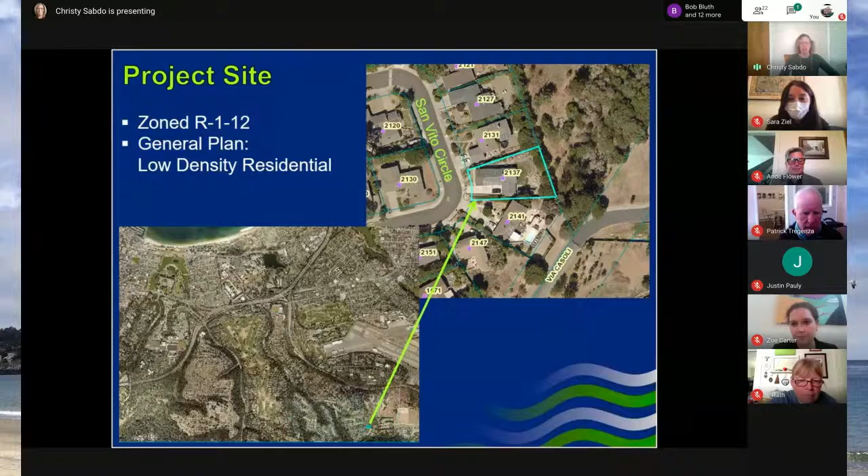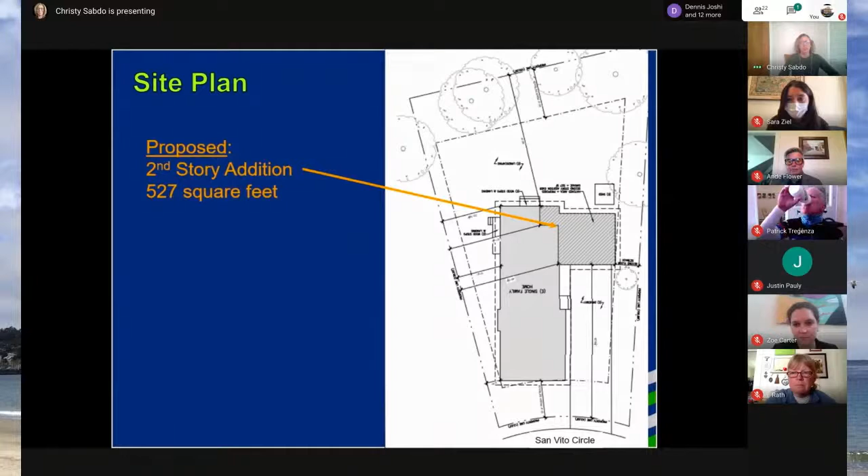The property is located in the Fisherman Flats neighborhood. It's zoned R1-12 and has a general plan land use designation of low density residential. The proposed site plan shows the second story addition located approximately 62 feet from San Vito Circle. The proposed addition is 527 square feet.

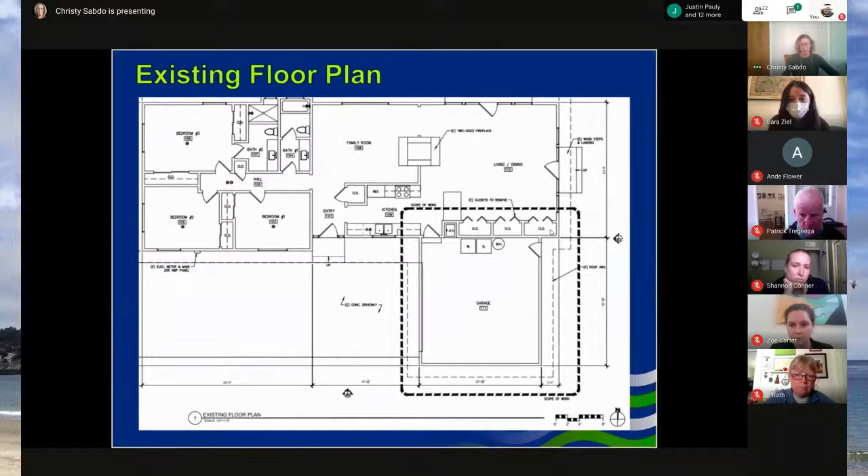This is the existing floor plan, showing the existing garage and some closet spaces by the garage that are going to be demolished for a stairwell leading to the second story. Here's the proposed first floor and second floor plan. On the first floor plan, it shows the location of the stairwell, previously closet space in the house. On the second floor, you'll see there's living space above the garage and a second story stairwell.

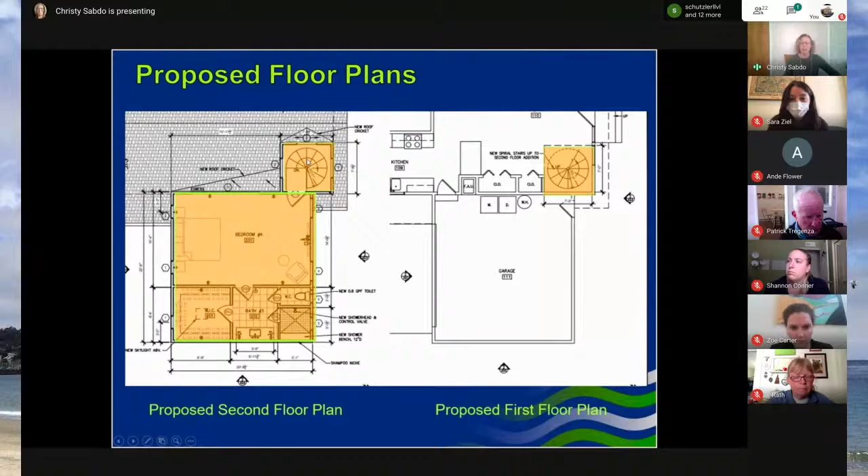This is showing the proposed location of the second story addition. It's located approximately 7 to 12 feet from 2141, the closest residence to this addition. The addition is located approximately 45 feet from 2131, so further than this one here. The back of the lot backs up onto this vegetation corridor.

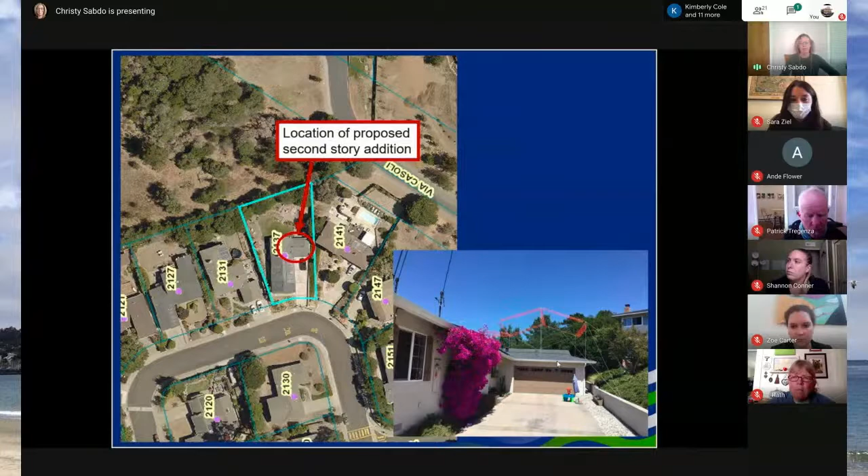Here's a picture of the story poles, I have some better pictures coming up. This is the west elevation on the San Vito frontage, showing the second story addition here over the garage, and then the second story stairwell here.

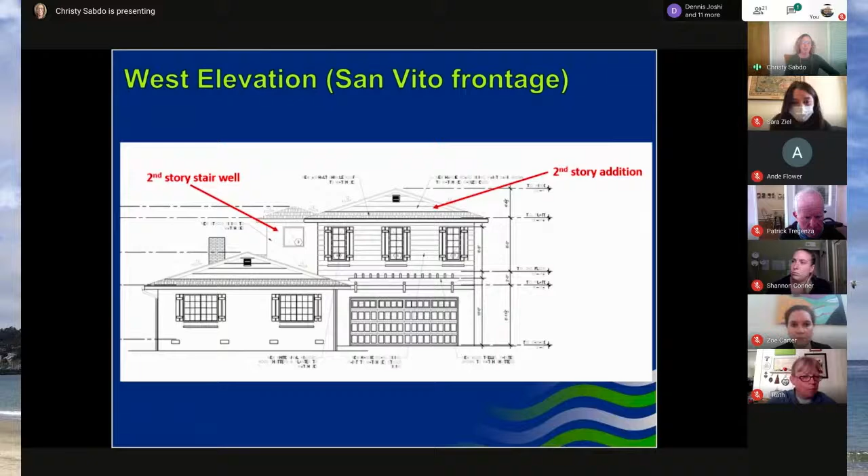The second story addition will have hardy board siding, which complements the gable element on the existing residence. Also, the windows will match, not in size, but in style, and they'll have shutters, and landscape planters under each window, which matches the existing residence. The second story stairwell will have stucco siding.

Here's the north elevation, which is the elevation furthest from the adjacent neighbor, about 45 feet. They do have windows, but due to the distance between the residences, there should not be privacy impacts. There still will be hardy board siding on the addition, and the stairwell will have stucco.

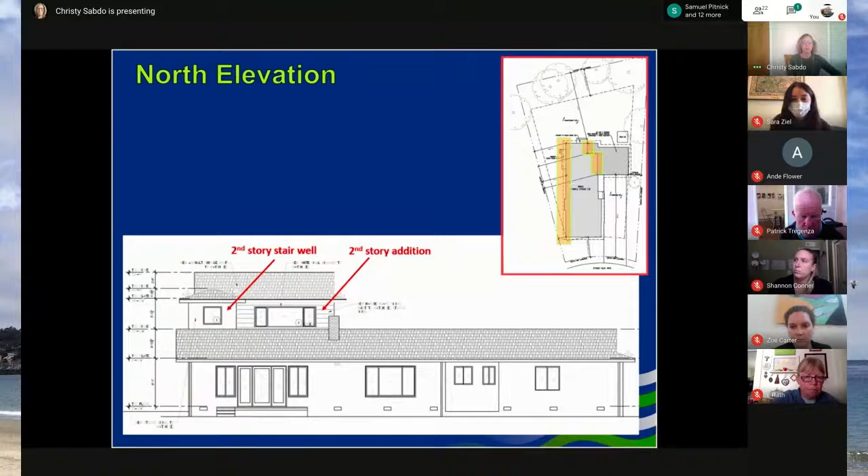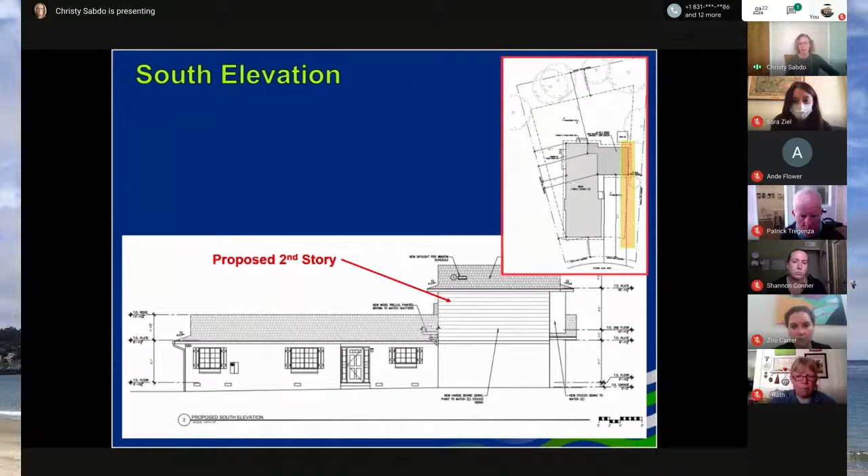The south elevation is closest to the neighboring residence, and you'll notice they don't have any windows, so there will be no privacy impacts. The east elevation faces the rear of the property, that vegetation corridor, so again there won't be any privacy impacts, and the finishes complement the existing residence.

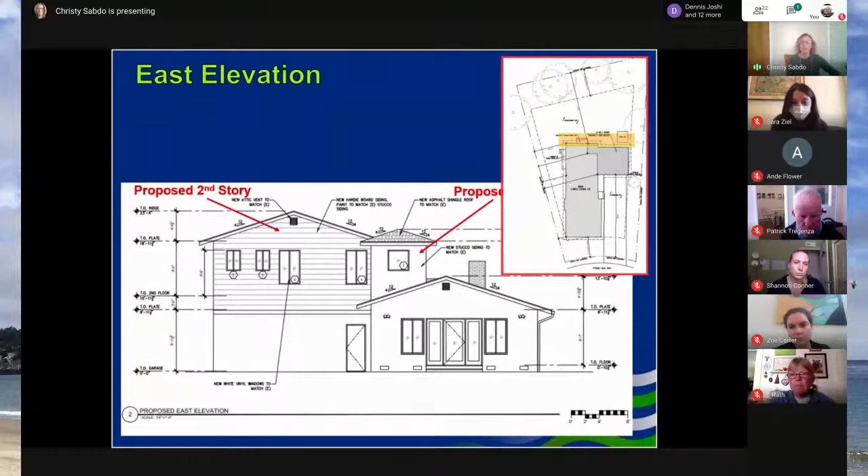The proposed second story addition meets all of the R1 standards, including the second story setbacks, and the building height is under the maximum allowable of 25 feet.

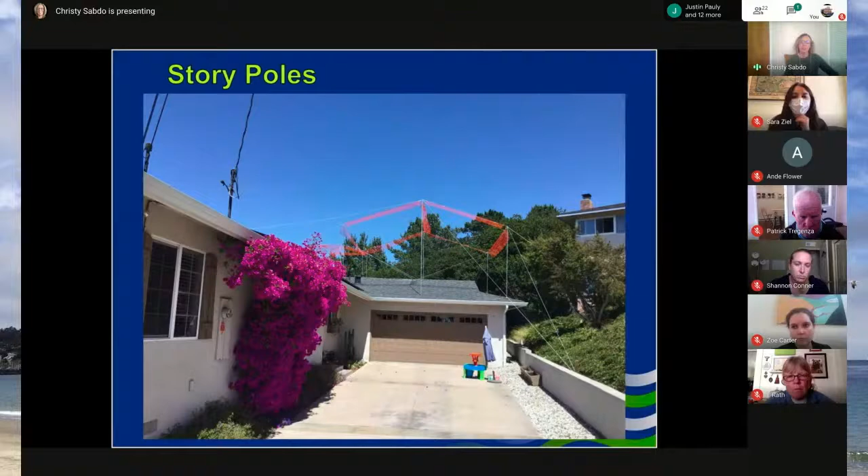Here's some pictures of the story poles. I have about 3 pictures here, and you'll see the closest residence, kind of how it looks in relation to that based on these pictures. And this is the gable element I was talking about that has the horizontal wood siding that will complement the Hardie board horizontal siding on the addition.

So in closing, here are the architectural review findings. The proposal meets all the required development standards in the R1 district. It meets second-story setbacks, for example, and is under the allowable height of 25 feet. The alterations are of single-family residential character and compatible with the surrounding area, and there won't be any privacy impacts.

On the south elevation, the one closest to the neighboring residence, there are no windows proposed. On the north elevation, furthest from the adjacent residence, they do have windows, but it's 45 feet from that residence. The rear of the property has a vegetation corridor. The project is not expected to impair any views. It's consistent with the R1 standards and the single family guidelines.

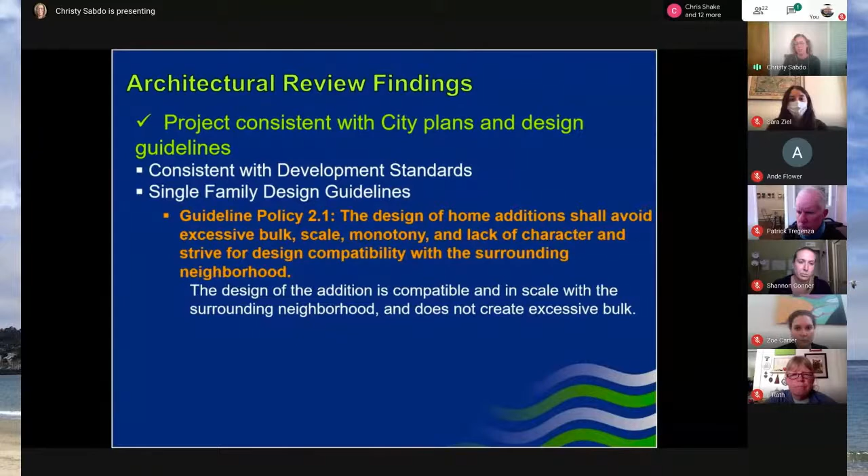There are a few guidelines that apply here that I'll review. Guideline policy 2.1: the design of home additions shall avoid excessive bulk, scale, monotony, and lack of character, and strive for design compatibility with the surrounding neighborhood. I think they've done a good job of making the addition compatible in design and scale with the existing house and surrounding neighborhood, without creating excessive bulk.

Guideline 2.1.1 states single-family dwellings that are boxy or without any recognizable architectural detail should be avoided. The proposed addition does have architectural character and detail that add visual interest, such as breaking up the mass of the second story. The stairwell is offset from the addition, and a little bit lower. There's a wood trellis between the first and second story, which adds an interesting architectural detail, and the wood shutters and planters also add details and complement the existing residence.

In closing, the exterior finish, colors and materials do complement the existing design of the residence and are compatible with the architecture of Monterey. The applicant is here if you have any questions, and he does want to make a short presentation. We'll answer questions, and I'm also available for questions.

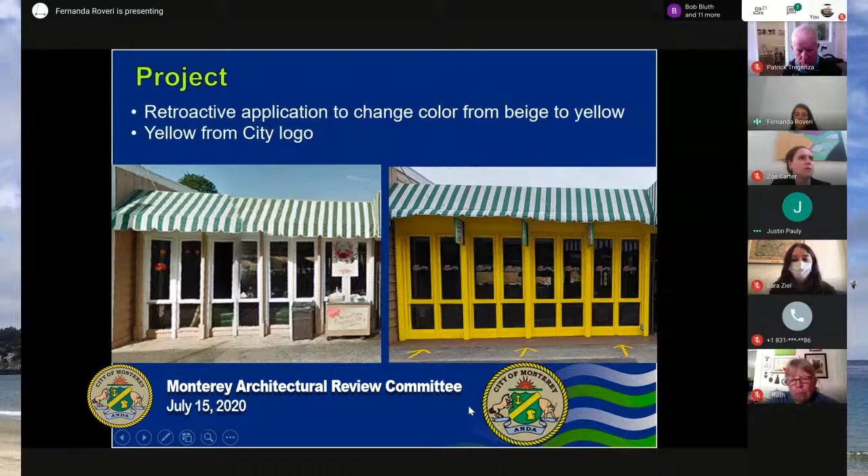Going through the Waterfront Master Plan, it says that Fisherman's Wharf is characterized by diverse and interesting color schemes, and that color should be a combination of bright colors such as pink, blue, and yellow, and muted industrial tones of gray or brown. It also says that projects should create a cohesive and distinctive visual experience by visually enhancing the planning area.

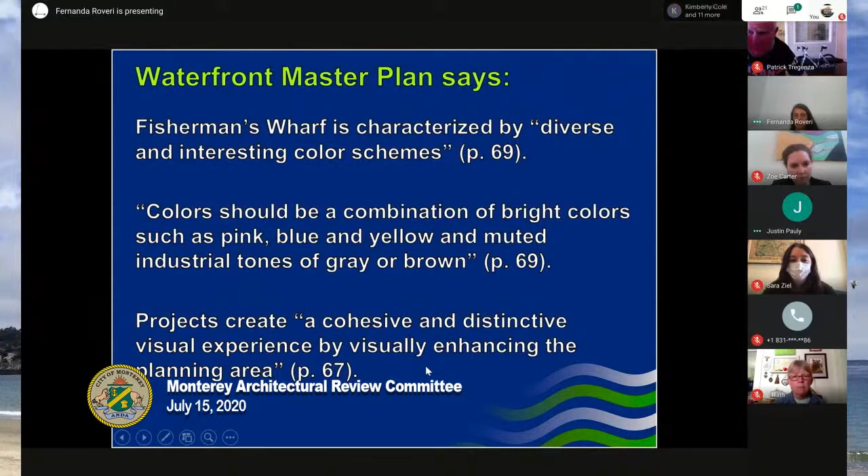Staff did a field trip to Fisherman's Wharf and found that 3 other buildings besides Krabby Jim's are painted yellow, including Old Fisherman's Grotto, the Crab House, and Princess Monterey Whale Watching. For background, there are 23 buildings on the wharf.

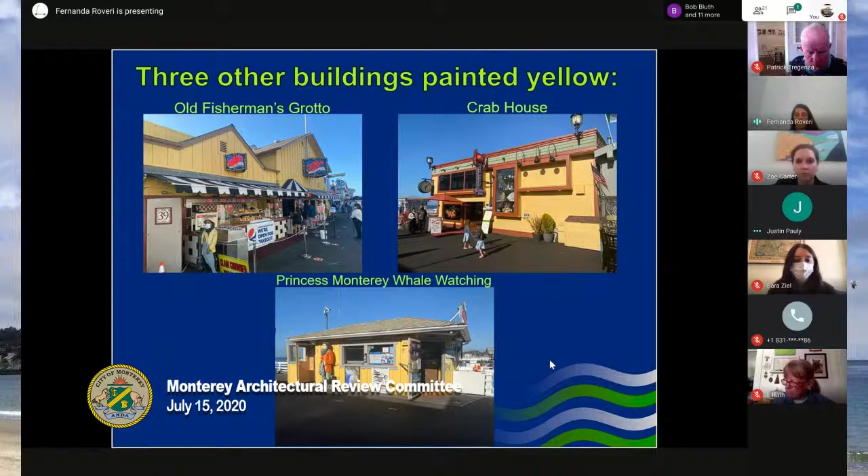The project was compared to the Waterfront Master Plan. One objective says that Fisherman's Wharf shall be diverse and use interesting color schemes. This is consistent because the project would still keep the beige color on either side of the yellow recessed facade, creating a diverse color scheme that combines beige with yellow.

The other guideline is that color should be a combination of bright, such as pink, blue, and yellow, and muted, such as gray or brown. The project is consistent because it combines bright yellow and muted beige. Lastly, the project shall be cohesive and promote a distinctive visual experience, which it would.

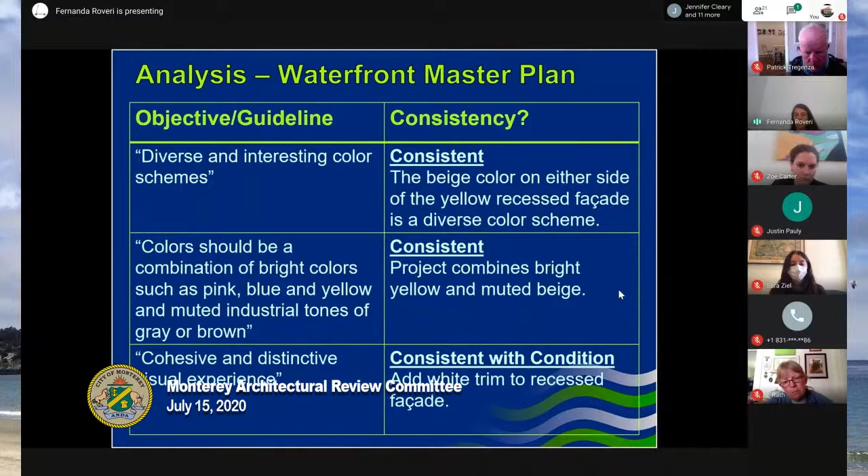However, in order to achieve cohesion with the rest of the building, staff is recommending that the applicant add white trim to the recessed facade.

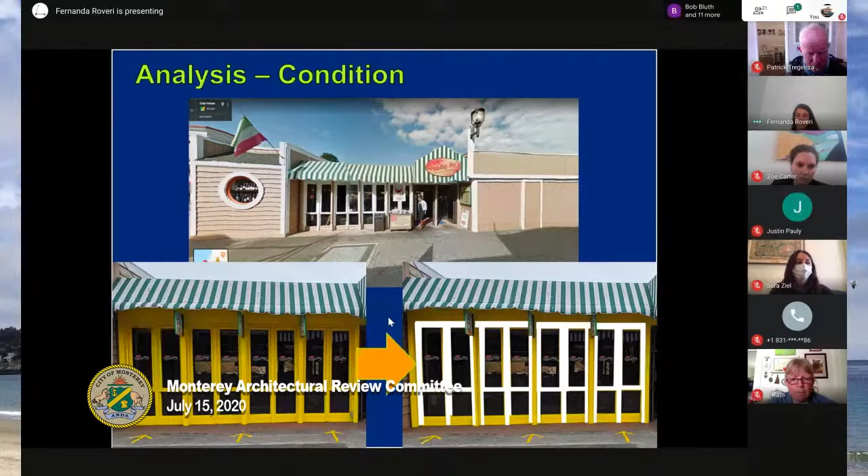Staff's recommendation is to approve the project with this special condition: that within 1 month of the date of this approval, the white trim around the windows shall be added back to the recessed building facade, and that the paint shall be muted rather than high gloss. That concludes my presentation, and I'm available for questions.